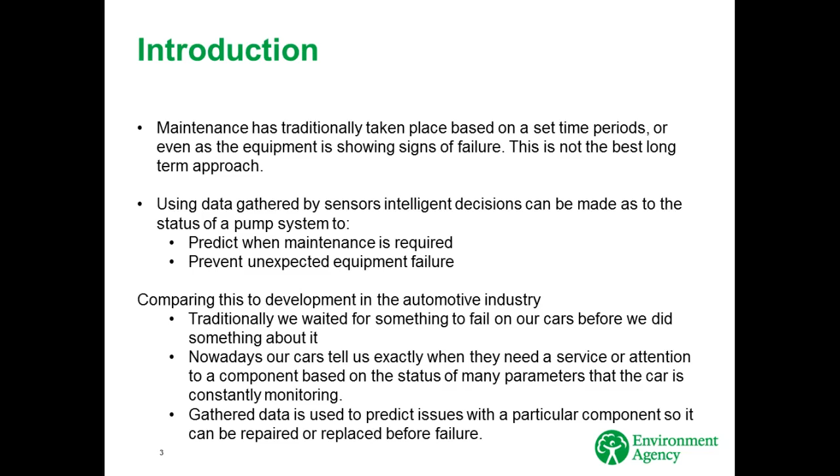So now the car tells you exactly when you need to give it some attention. It's constantly monitoring, and it's looking at what's going on. So gathered data is obviously the right way to go for this.

The evolution, I've used this to explain this. When I joined the industry pre-1990, it was the age of control systems. Everything was becoming automated. We put things in. We've made the processes more efficient. Downtime was expensive even then, and the control systems really improved that situation.

The digital age has come along, adoption of control systems, again, to further improve process efficiency, moving from reactive to preventative maintenance, and then again on to the thing that we're looking for, predictive maintenance. We've seen the evolution of the Internet of Things, energy efficient product. All of this is very much the ethos behind what the Environment Agency is trying to do.

Someone touched on this morning carbon, a very interesting thing there. What is the cost of carbon to a project? To us, a breakdown costs us carbon, because we have to have people going out there, we have to have emergency equipment behind it. It's a very carbon intensive process in a breakdown, and that's without actually having to bring new equipment in.

We're in the age of analytics. That's the way we're viewing it now. Focus on total cost of ownership, whole life cost. I think somebody touched on that this morning. It's not the cost of a component, but it's the cost of running it. So it's the energy cost together with the maintenance cost over the lifetime.

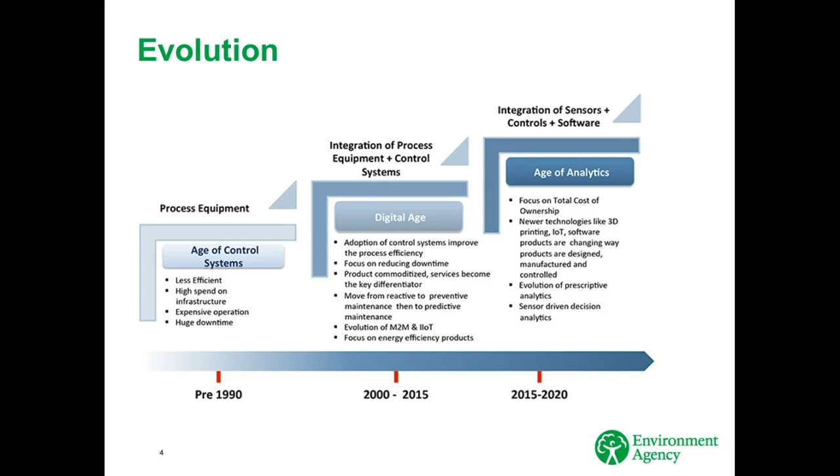So the better we can get with sensor-driven decision analytics, the longer we can have an effective lifetime. We can sweat the assets much longer than we ever used to do. So we're looking at the practical application of an intelligent maintenance system. So we've got interest in tools and systems that mean we can spend our maintenance budgets more effectively.

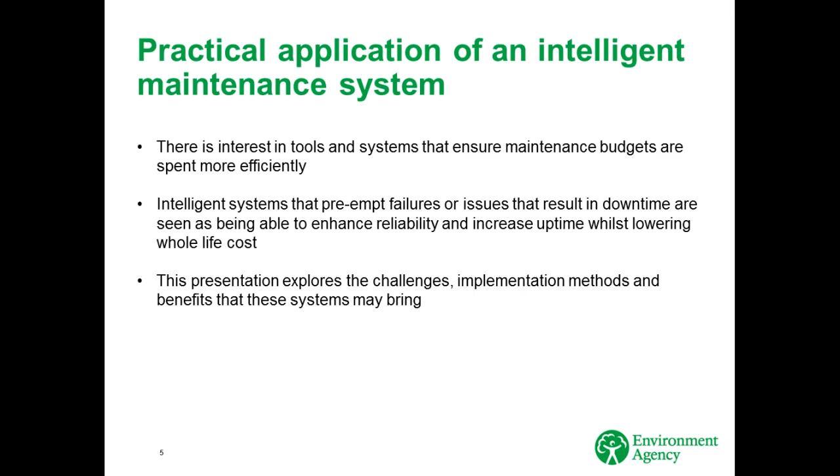Intelligent systems that preempt failures - that's what we need. We need somebody to tell us something. So we've got challenges, which I'll go into as to how we can adopt these systems, because it's not simple.

We have very low utilization. I can take you to a pumping station, not very far from here, that ran 25 hours last year. We've got other pumping stations running at about 70% utilization.

So there's probably not one size that fits all, but there's going to be a break point as to where we can use this technology effectively, and where, in fact, we'll just have to continue with a strategy of planned maintenance. Many different types of site.

We've got over 300 pumping stations, and they're pretty much all different. The way the agency evolved over the years out of the water authorities in the 1990s when we were formed meant we inherited pumping stations from Yorkshire Water, Anglian Water, Severn Trent, and they all had completely different design philosophy, different strategies behind them.

The equipment we've got, we're starting to get better at having equipment at one asset that matches another asset, because when I started in the Environment Agency about 11 years ago, we had 4 pumping stations that had similar pumps across the country. They all had totally different pipework arrangements, totally different types of pumps, totally different types of pumping. We had different operating philosophies, and in fact a very, very different take on maintenance.

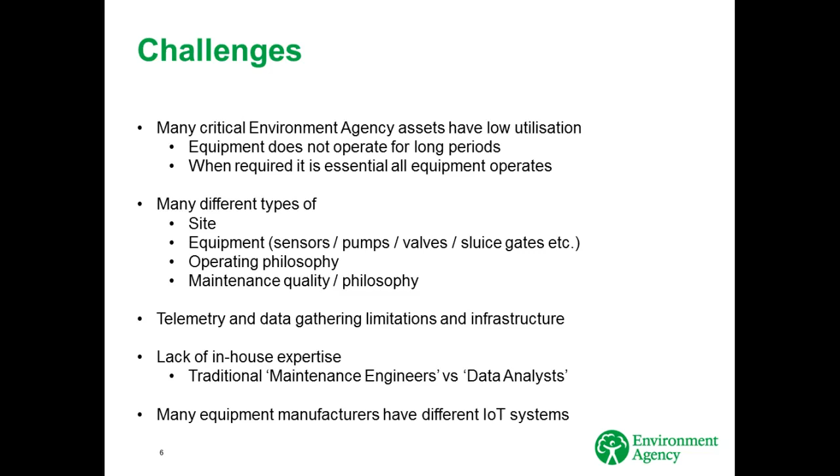But embedding sensors in pumping stations, we've got to do that. We've got to put enough intelligence around there to gather the data to tell us something meaningful. We've then got to use the data, develop the algorithms, which actually tell us what's going on.

We've got to have better automatic planning for replacement of assets, so we will be able to tell from the algorithms the actual wear patterns. When do we need to start planning for replacement?

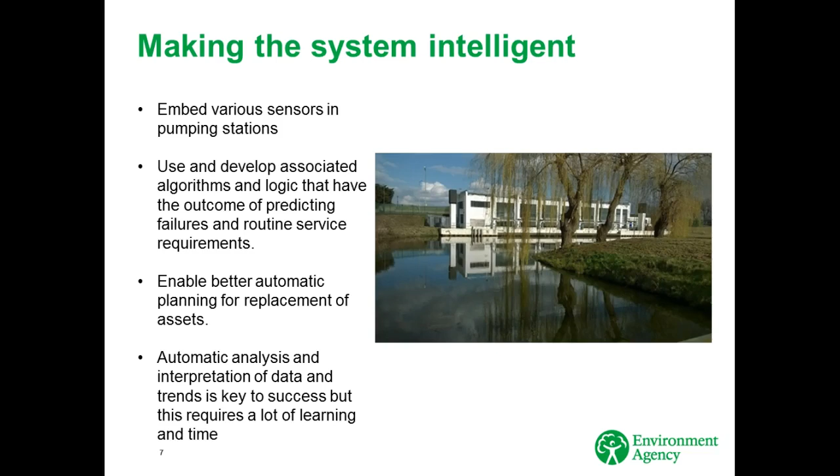Now, it's very much an engineering opinion on a lot of this, and we've had very many experienced engineers in the agency, many who've done over 30 years service. That experience is now lost, and our new generation don't have the benefit of that behind them. Automatic analysis is the key to this, but as it says there, it requires an awful lot of learning and an awful lot of time.

So how are we going to do it? Instrumentation, there's lots of it about. These are just a few examples of it. The most interesting one there for us potentially could be noise.

We've seen this done before. I've seen this done on an inlet works in my days prior to the Environment Agency, for one of the water companies.

When they looked at noise analysis on a sewage treatment inlet works, the main sewage works in Edinburgh, they reduced breakdowns by a factor of 50 through noise analysis. That saved them in the order of £250,000 a year in unplanned breakdowns.

That was achieved by a novel system which involved an operator walking around to listen, look, and understand. So how can we replicate this? How can we replicate the ear better to understand the patterns happening inside the pumps?

With data analysis, we know there will be anomalies in what sensors are picking up. We've seen much of that today, and I'm sure we'll continue to see much of it, but degradation is the issue.

Gradual changes happen when we're not running our units. If there's a period of dry weather for maybe 6-8 months, we've seen many pumping stations actually have no work to do for 11-12 months. So how are we going to understand the degradation?

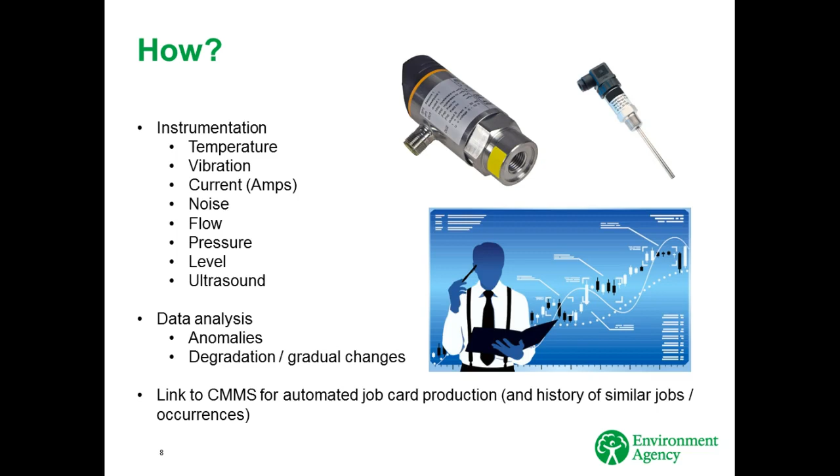That's what I told the board, and the board said, if you can do that, yeah, you can have that job. So the aim is the take-up of new sensing technologies, predictive analytical techniques, so we can look at how we can develop this strategy.

The strategy of proactive maintenance is what we want to adopt, but we're not going to be able to adopt it everywhere. We're still going to have to do some PPM, still going to have to do some run-to-breakdown, but this strategy will save us money, and we believe there's 20 to 30% savings in our strategies if we do this effectively.

So we're doing a proof of concept and pilots, we're on that at the moment. Unfortunately, the EU tendering process has been a little bit cumbersome, and we've had one slight halt so far, but we are tendering again to look at this, to explore the challenges in depth.

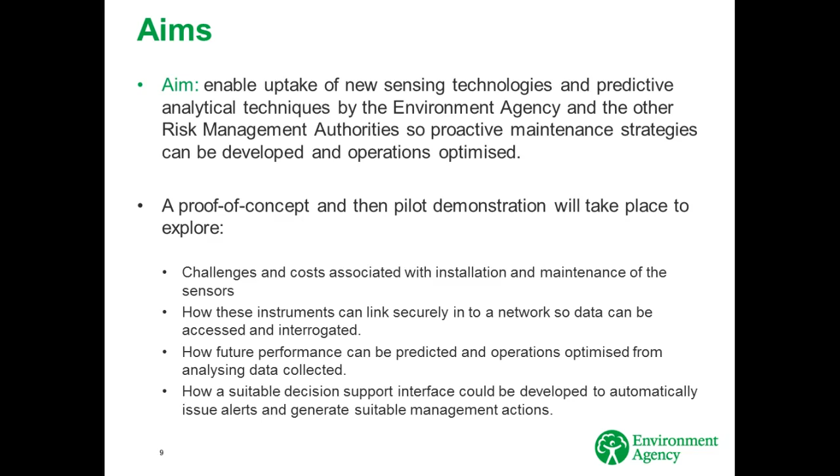We're looking at data collection, sensor collection, how it can work together, a design, an implementation, and then a period of probably 18 months of data collection and correlation to see if we were right.

So we're looking at the contractor to develop algorithms for us, to see if we can understand the remaining useful life as an indicator of what's going on in there.

We hopefully will be able to develop these algorithms in a simple form, red, amber, green type analytics to tell our operators when they need to do something.

But we need time to change and time to learn before we can operate, before we can unlock the operational efficiency savings, which is our motivator to embrace the technology.

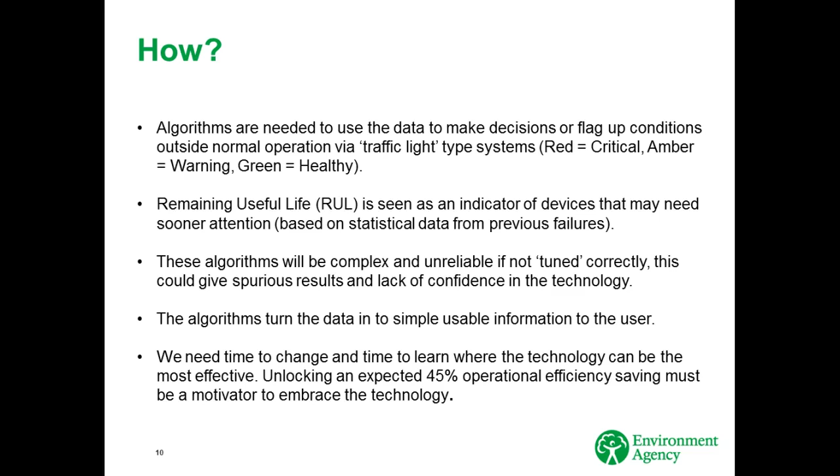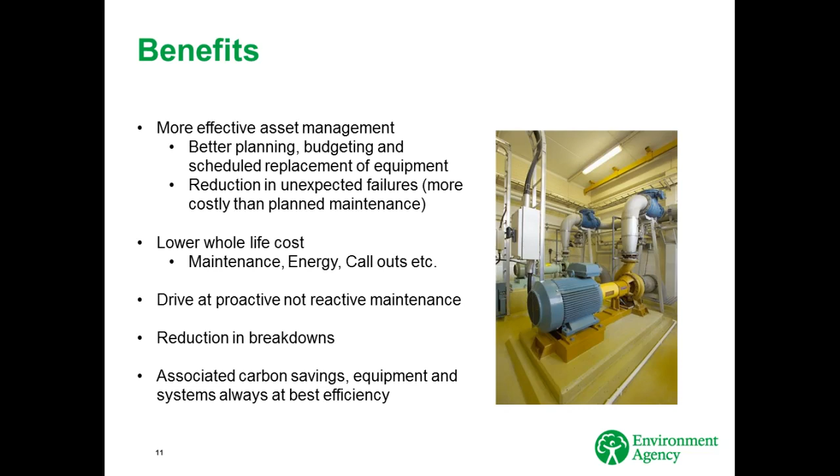We've reduced our carbon footprint by 40%. My target is to drop that by another 10% in the next 3 years.

The strategic context of this: 340 pumping stations, 12 million a year annually on maintenance, and 35% of carbon emissions are from our operation. That 12 million, we're looking to drive down to potentially in the order of 10 million. And carbon emissions, we believe we can shave another 5 to 8% off just by efficient operation of assets.